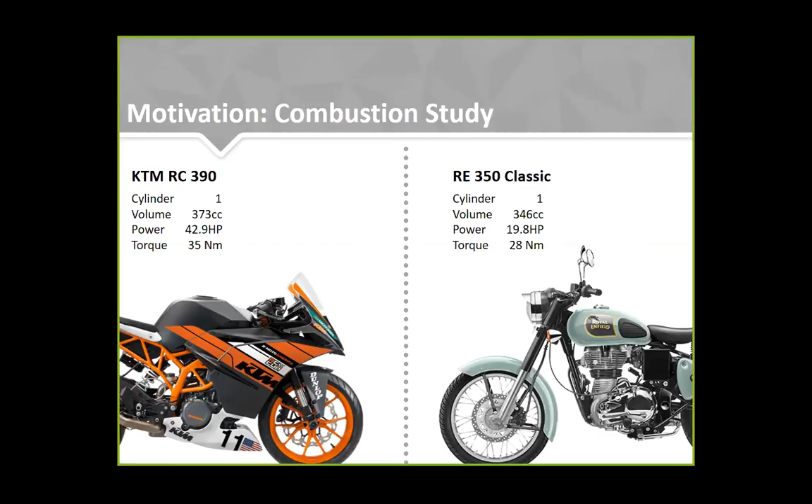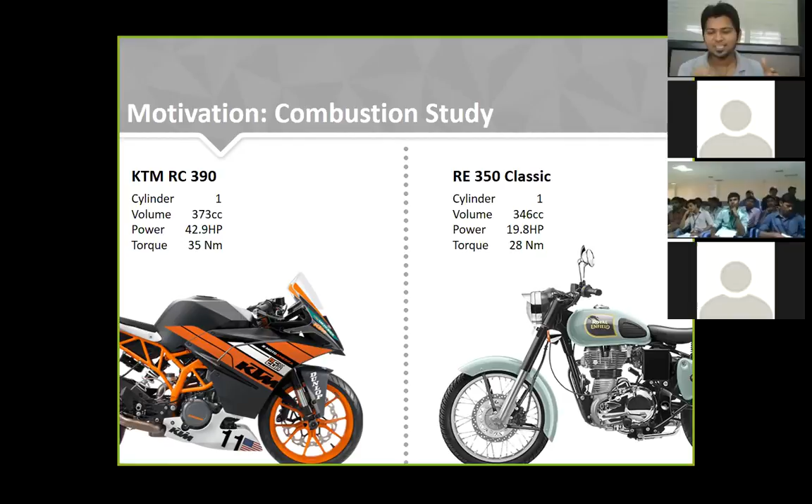So if I compare these parameters with the Royal Enfield 350, the output parameters of the engine actually vary - the power only goes up to 19.8 HP, and the torque goes only to 28 Newton meter. So this is the difference between these two engines, and you know both bikes are for different purposes, and both perform differently. So we have to find out technically what is the technical reason or aspect lying behind the conception or design of these two engines.

So guys, this is the technical aspect. If I compare the power-to-volume ratio of the KTM to the power-to-volume ratio of the RE, that's Royal Enfield 350 - the value that comes out for KTM 390 is very, very high as compared to the RE. This means the efficiency of the KTM RC 390 is much better than the Royal Enfield 350. You can think about that.

So if I talk about the torque-to-volume ratio, that again, in the case of KTM, is much higher than that of the RE, the Royal Enfield 350. So from these two figures, basically we can conclude that the KTM RC 390 engine is more efficient as compared to the 350. But actually, is it true or not? We will find out the reasons and answer in upcoming slides.

So from these two figures, one thing is clear: the KTM 390 engine is performing better as compared to the 350. But the question is this: are the Royal Enfield people fooled? Why can't they make their 350 engine similar to the 390 in efficiency? So these are a few questions we have to understand technically.

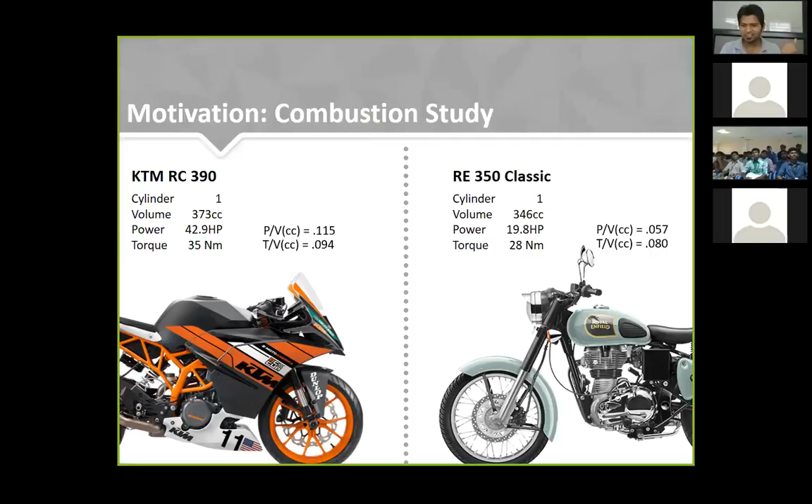So I'm going further on this study. If I talk about the engine design objective - any company who designs and manufactures engines basically has four objectives in front of them before designing any engine. The first thing is the engine should give maximum useful work, that is torque, maximum useful work. Second, it should emit the lowest possible emission in exhaust. And third, maximum fuel economy, so it could perform better in the market. And the final thing is smoother operation.

So any company basically tries to fulfill all these four parameters in the engine design. But if I talk about lower cost engines, like the Hero Honda engines of Passion, Splendor - these are very cost-effective engines. They may comply with the first three aspects, meaning maximum useful work, lowest possible emissions, maximum fuel efficiency, but are a bit rough, or we can say have a bit lesser smooth operation.

You can understand that these are the basic four parameters behind design of the engines. If you refine all of these parameters step by step, the cost of the engine will increase. And that is why the engine of Yamaha R15 or Yamaha series engines are costly and very efficient as compared to any of the engines in the category of the bike. So larger you work upon these 4 parameters, larger the cost of the engines. And if you give fewer of these parameters, the cost of the engine will be lesser.

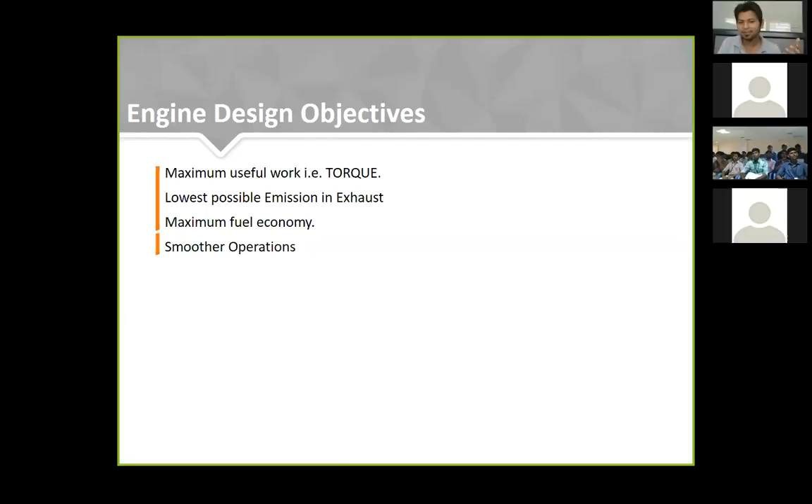So these are the basic 4 parameters behind the design of any of the engines. And this is the basic working of the 4-stroke engine, which I hope you are all aware of.

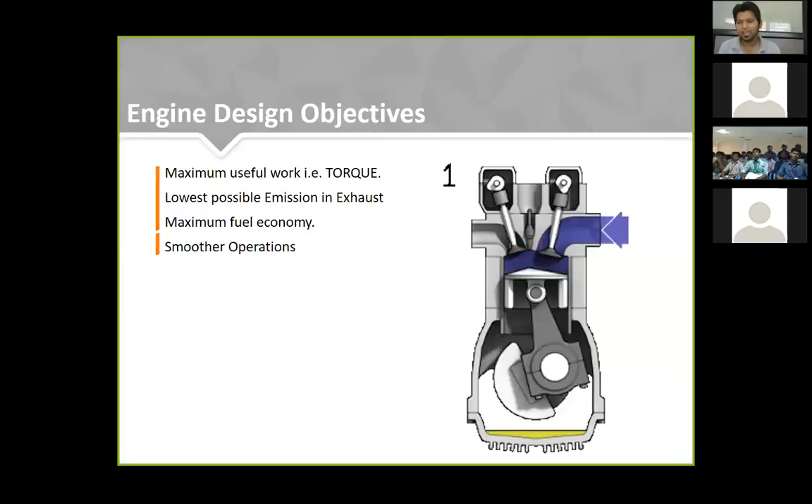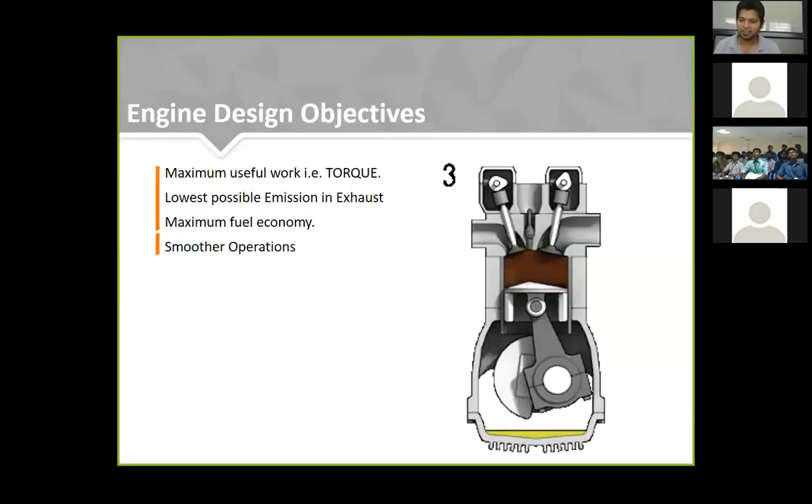The 4 strokes in the working of the 4-stroke engine are: first, the intake stroke, through which the air and fuel mixture is induced inside the engine. Second, the compression stroke, which compresses the air and fuel mixture. Third, the expansion or power stroke, in which the useful energy of the engine is extracted out in the form of push to the piston.

And the final one is the exhaust, through which we expel out all of the waste or residue inside the engine. Now, through this very engine, I'm going to introduce the basic parameters of any engine. Some of you may be familiar, but try to go through all these basic parameters.

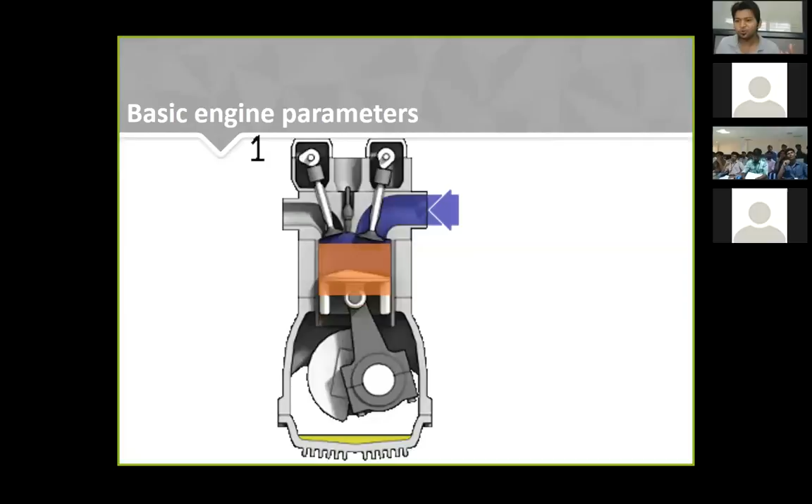First of all, the cylinder. The one in which the piston reciprocates is known as a cylinder. The volume of this cylinder is known as the cc of the engine. I mean, how much liquid you can pour into this volume, that could be termed as the cc of the engine.

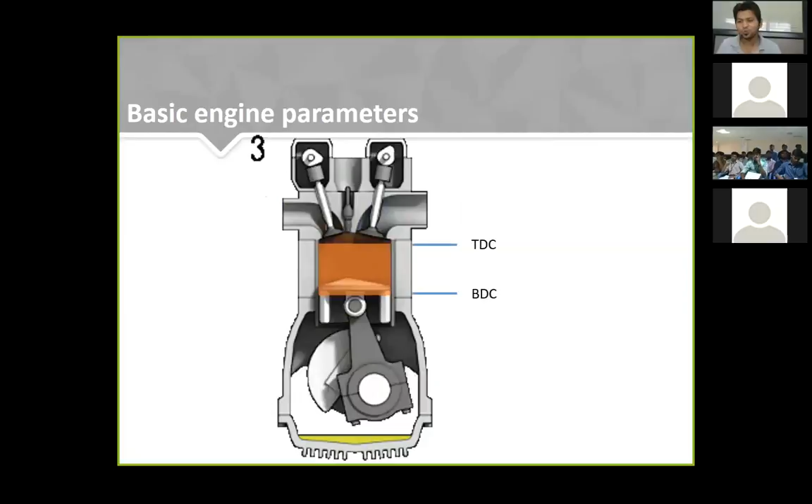Similarly, in this cylinder, the piston is reciprocating between 2 extremities, the top one and the bottom one. These 2 are known as the top dead center and the bottom dead center, which you are all already aware of.

If we define this cylinder, it is basically having 2 parameters: the diameter as well as the length. So this is the main configuration of the engine, the main deciding factor of the cylinder, or the main depending parameter of the cylinder - the diameter as well as the stroke of the engine.

In any engine, among the different designs present in the market, they may have a different kind of cylinder. Basically, there are 3 different kinds of cylinders available in the market on which actual practical engines are manufactured: over, square, and under. I hope you recall these parameters - you might have heard of these 3 cylinders somewhere in your study.

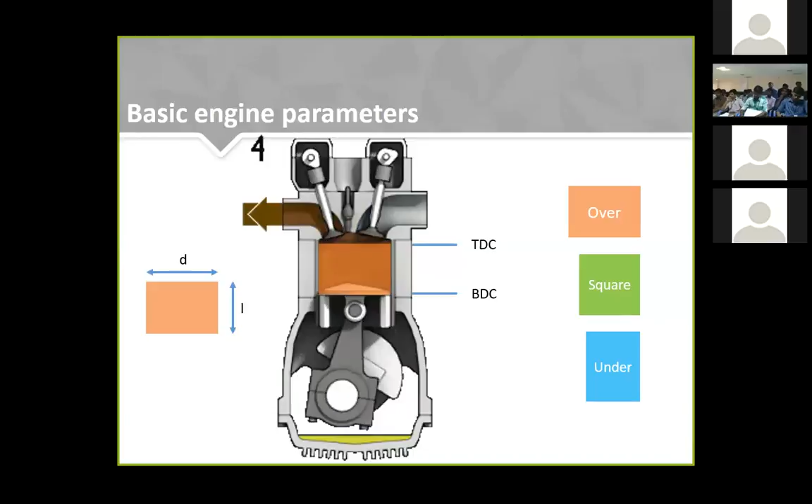The over cylinder is basically having a larger diameter and smaller stroke length. If I talk about the square, both D and L ratio, both parameters are equal. And if I talk about the under, the D is smaller than the L. So these are the 3 configurations available in any engine design in the market.

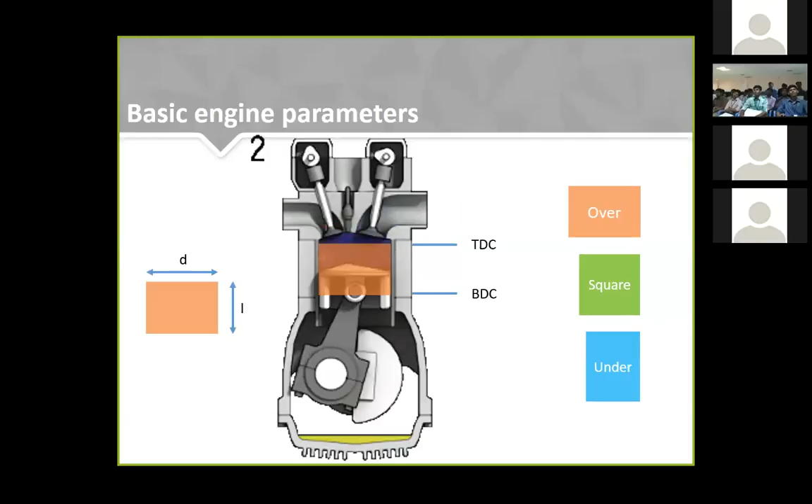If I talk about the basic 2 engines on which we started our study, the KTM 390 and RE 350 Classic, in order to see the difference between these 2 engines from a technical point of view: the KTM 390 has a single cylinder, bore equals approximately 90mm, and the stroke is basically 60mm.

If I compare with the RE350, you can check it out - the cylinder of the KTM 390 will be called over, and the RE350 cylinder will be known as under square. This is the basic difference between these 2 engines - how you will feel the thump of the 350 and how you will feel the high rev power at high revolutions of the KTM 390.

So we will try to find out where this very configuration will make a difference in the performance of both engines.

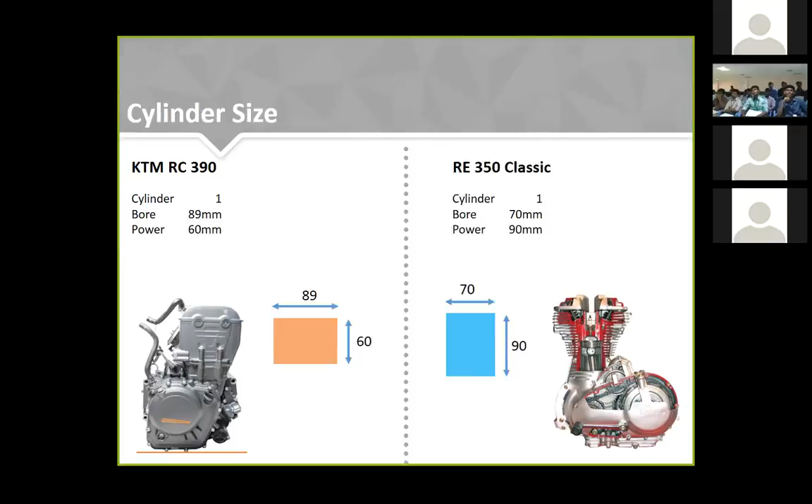Okay, so for example, let's take both the cylinders from both of the engines. We have a spark in both of the cases. I'm just going to carry forward a small experiment in front of you. Suppose that in both of the engines, we have a similar amount of fuel injected through the carburetor or through the fuel injector. So you can say that in both of the engines, we have a similar kind of fuel that we are going to burn.

And imagine that both of the cylinders are having an efficient or similar kind of blast of the fuel. So what you can conclude is, in both cylinders, if the air and fuel mixture burns, it will create a similar kind of pressure. Am I right or not? So a similar kind of pressure will be generated in both of the cylinders.

So if both cylinders have the same amount of fuel and are burning with similar efficiency, we can say they have the same pressure. But you know that the area of the KTM 390 is bigger compared to the area of the 350. So what you can conclude is the force that will exert on the piston in a KTM 390 will be higher compared to the 350 Royal Enfield.

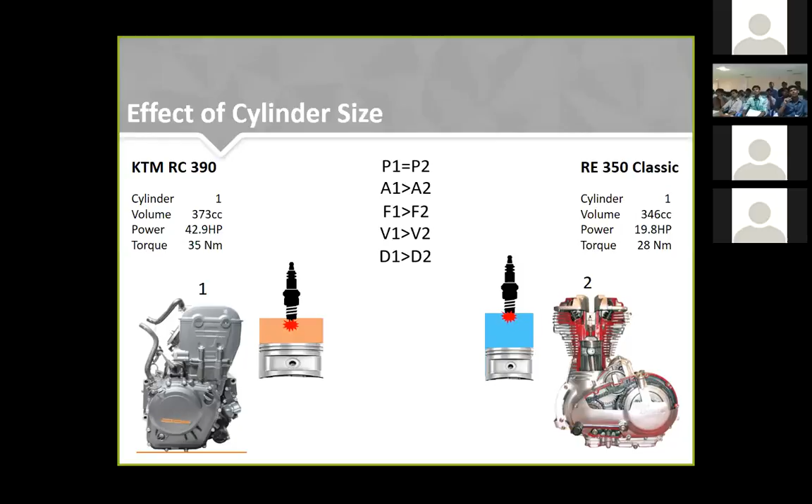Now you can feel why your 350 Classic or Royal Enfield cannot go beyond 6,000 RPM, and that is the reason why your KTM 390 can go up to 10,000 or 9,000 RPM. So we can conclude that the RPM of the first engine will be higher than the RPM of the second one.

We can say that the KTM 390 can go from 800 RPM, which is the minimum or idling RPM, up to 10,000, the maximum possible RPM. In the case of the RE350, you can go from 700 to only 6,000, not more than that.

And you know why you cannot go more than that, because you are stuck with the design of the piston. You have increased the stroke length of the engine, and by design you cannot go beyond 6,000. That is the technical parameter why this 350 cannot go beyond 6,000.

Okay, I think till this point everything is clear to you. One thing you can understand from here is, in the case of the 350, we have a blast, and in the case of the KTM 390, we have a similar kind of blast in both engines. Having the same kind of blast, but you can imagine that the gases inside the 350 remain for a longer time.

Can you imagine this point? So my point is, the burned or burning gases during the expansion stroke or power stroke remain for a longer time in the case of the 350 or Royal Enfield. That is the reason why the 350 or Royal Enfield will have a larger punch, because the burning gases remain there for a longer duration, continuously pushing the piston to the bottom dead center of the engine. So that is why the Bullet will have enough torque compared to the KTM.

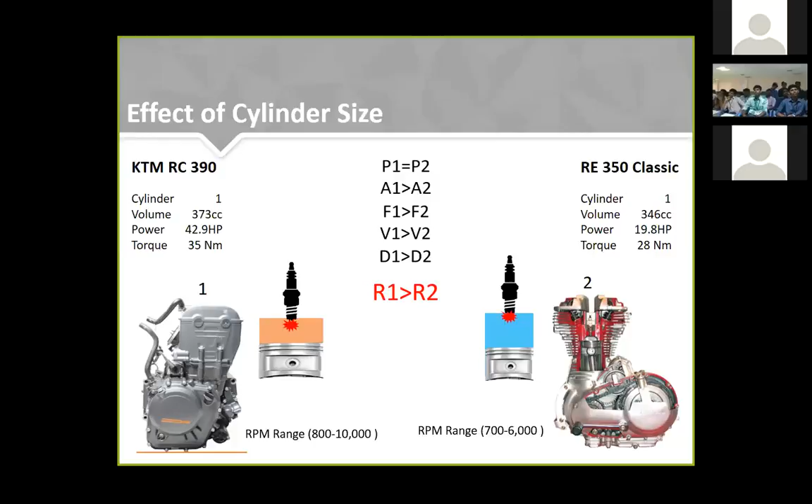First, can you show the cursor on the line? Please raise your hand if you can see the cursor. Yeah, okay good, I got the response. I was asking, can you see the cursor on the screen?

Take the same example again. You are three friends and need to go somewhere, and you have the first option with the 350. When you put your first gear in the 350 Royal Enfield, you will find there is a considerable amount of torque available at lower engine RPM. Even if you put the vehicle at an even lower engine RPM, you can find considerable torque available that will push any tremendous amount of weight on the vehicle.

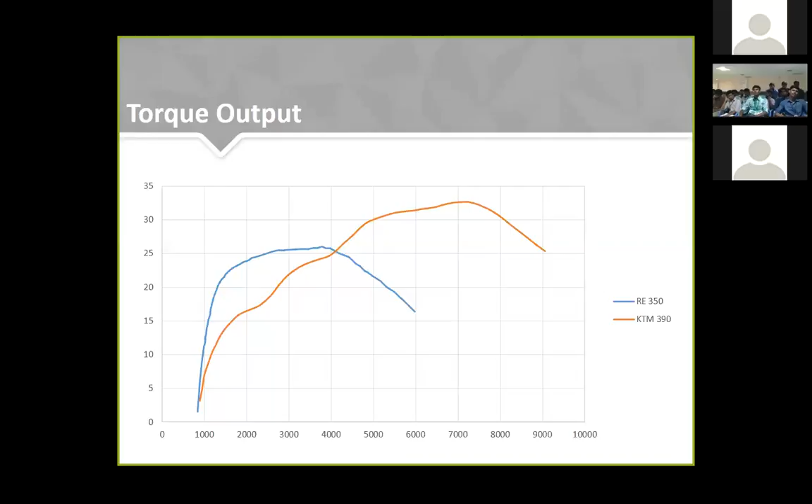But if I talk about torque at higher engine RPM, or for a racing vehicle, this engine will be at the top position. So that's the difference between the torque of these two. I hope you now understand the torque of the engine, how it changes with engine RPM, and which engine is better in terms of torque. So I conclude this point - now let's move to the next part, power.

But it's important to understand that this higher power of 42.9 HP is at a very high engine RPM for this engine. If I talk about the bullet engine, the Royal Enfield engine, this has 19.8 HP at a much lower engine RPM. Try to understand what I mean. If you compare both bikes at that same RPM, you'll find the bullet is actually better than the KTM.

The KTM is taking benefit only of its engine design, meaning it can go up to higher engine RPMs compared to the Royal Enfield. If I limit the RPM of the KTM 390 to 6,000 only, by any means like ECU mapping or ECU design, the bullet will be the better design than the KTM. Now you can understand what I'm trying to say.

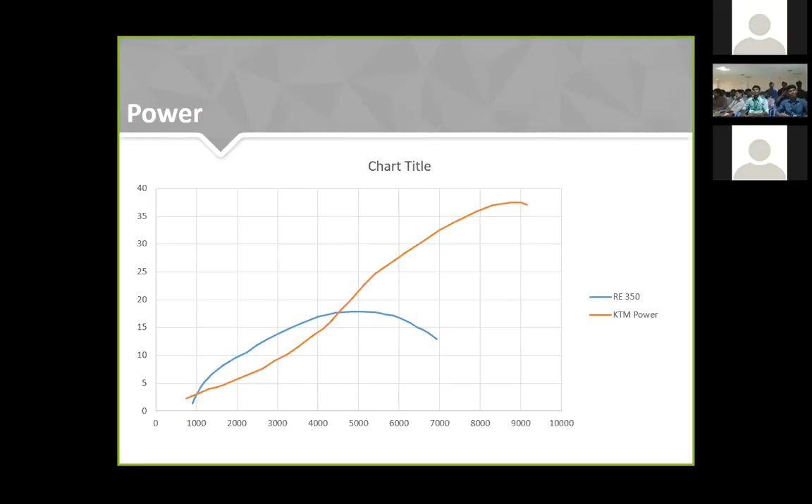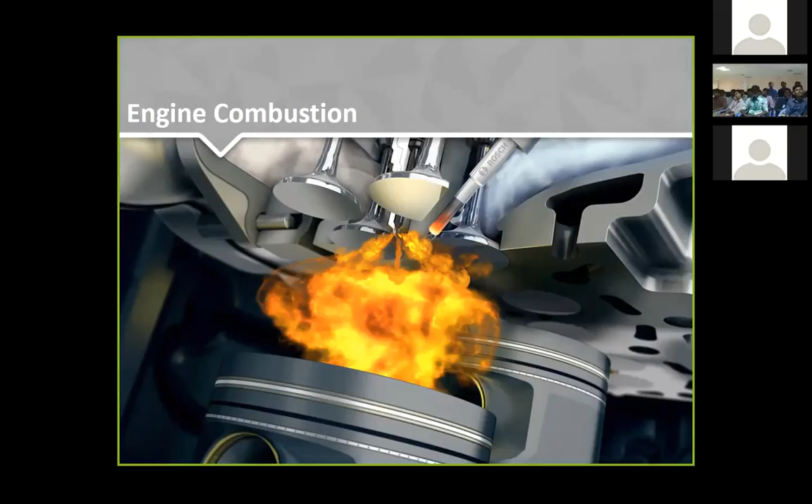I've taken this picture of a Bosch engine, basically a diesel engine, and combustion happens something like this in any engine, regardless of whether it's a petrol engine or a diesel engine. Let's get into the combustion of any engine.

So let's talk about combustion, the factors affecting optimal combustion. I'm going to talk about optimal combustion — basically the combustion which is best on its own, nothing can be expected beyond this. That is known as optimal combustion, considering all parameters within a safe boundary.

For example, you may have the best combustion, but at the same time you're putting lots of load on the engine — that is not optimal combustion. Optimal combustion is the best output from the engine considering the engine design in a safe position: your engine is not going to blow, your valve is not going to come out, everything is safe, but you get maximum output. That is optimal combustion.

Let's define the parameters affecting optimal combustion of any engine. First is the compression ratio, which you're all aware of. Compression ratio means...

Second is the air fuel ratio. In any engine, the fuel goes in mixed with air, and the quantity of fuel and air within the mixture is known as the air fuel ratio, which you're all aware of, I guess.

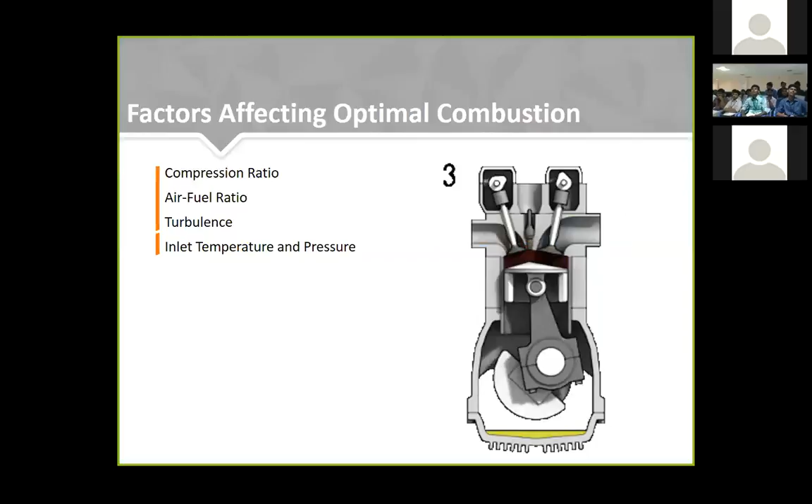In the same way, for air fuel ratio, I am going to discuss its effect on an engine. For example, if I send a lean air fuel mixture - lean meaning a large amount of air but less fuel inside the engine - how will combustion happen inside? Whether it will be optimal or not, whether combustion happens in a proper way, we will figure it out.

The same applies in the case of turbulence, and the same in the case of temperature and pressure of the inlet air. So let's start with the compression ratio. Let's unfold each and every component step by step.

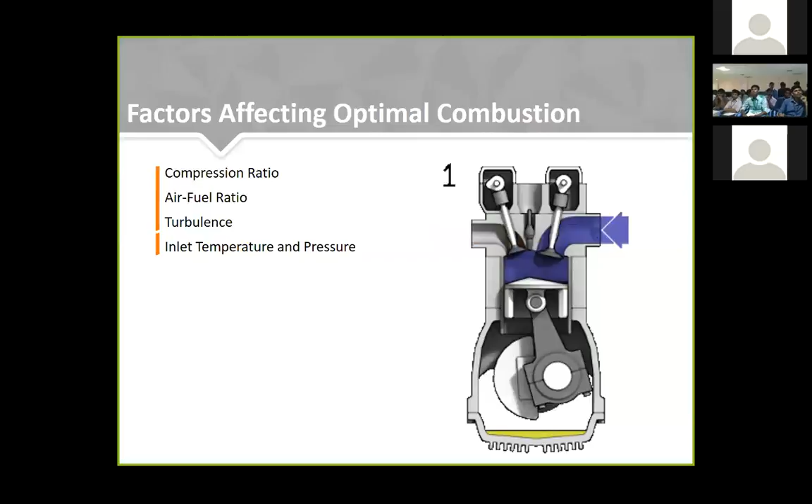Let's understand what's happening inside the engine with the crank angle. As the crank angle progresses, what activities happen along with it? This stage is basically your compression stroke. And before reaching top dead center, at some point, we have a spark.

You might have studied in your IC engine course that the spark is always started a few degrees prior to top dead center, not at top dead center itself. Now I'm going to show you why - what is the reason behind it. The spark is given at some degrees prior to top dead center.

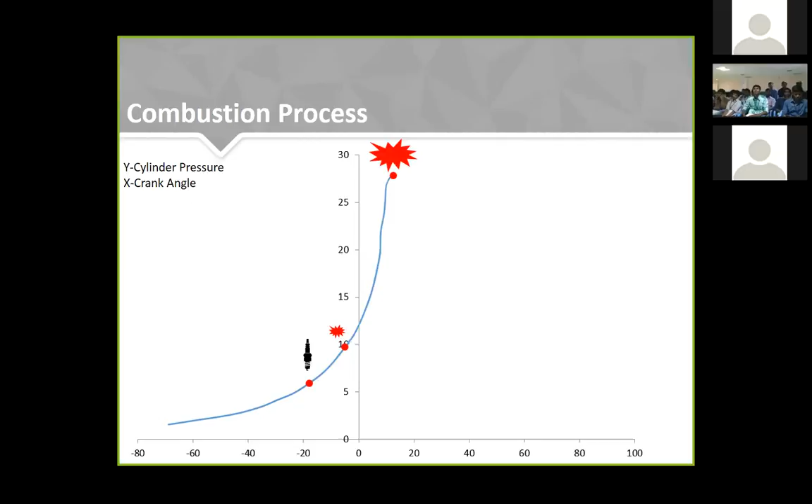The gas continues to compress, and a point comes when the flame starts, or the first molecule of gas gets fired or burned. As it continues, the rapid pressure rise happens, and the bigger blast occurs at the top of this peak you can see. As the piston goes down, this pressure drops to this point, which is where the remaining amount of fuel has burned - this is the further part of the combustion.

I think it's not very difficult to understand - you're already aware of this. So I'm going to add some extra points here. What are the important things in this part?

The first important thing is this: the point at which you give the spark and the time at which it actually gets burned - there is actually a time gap. When you give the spark inside the engine, it does not catch fire immediately, it takes some time. You can find it here - it's happening at -20 degrees and actual burning happens at somewhere around -5.

You can find there is a 15 degree gap. That gap is very important for us from an engine design point of view. When we design any practical engine, whether it's a Bajaj engine or a Pulsar engine, this considerable gap needs to be kept in mind while designing. I'm going to show you step by step how it will affect the engine design if you do not consider this gap.

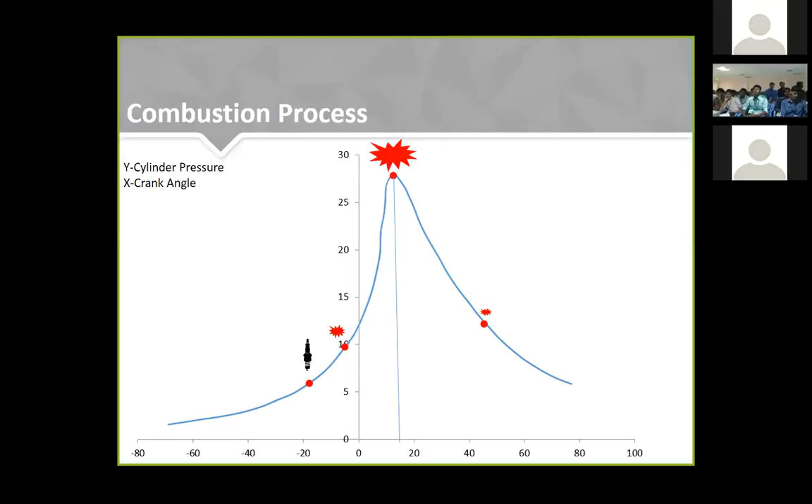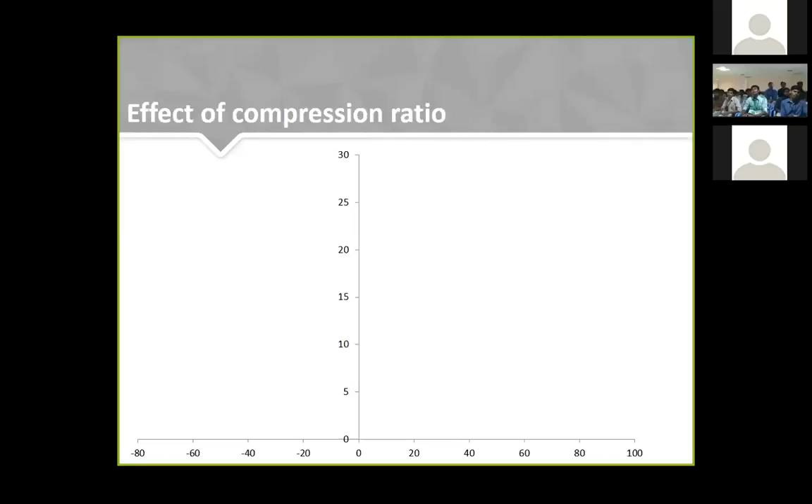Now, in a further aspect, I'm going to show you the effect of compression ratio. For example, you have an engine with a 10:1 compression ratio, and you want to change it to a 12:1 compression ratio. What happens inside the engine, and what do we need to change considerably in the engine? Let's talk about it.

This is the base engine having a 10:1 compression ratio. I'm expecting everybody already knows what compression ratio means, so I won't repeat that point. If, through mechanical changes or any kind of mechanical system change, you modify that very engine up to a 12:1 compression ratio...

So what different kind of peak will be generated in that very engine at the same RPM, assuming the same amount of fuel is going in. In that case, this peak will happen over here. This is the 10:1 compression ratio, and this may be the higher compression ratio, say 12:1. This kind of peak will happen over there.

You can find it over here. There's one glitch though: we haven't changed the timing of the spark. For example, in this engine we again fired the spark at the same time as in the previous case. What will happen? This time will be shortened somewhat. In the previous case this time was a bit higher, but in this case it is a little shortened compared to that one.

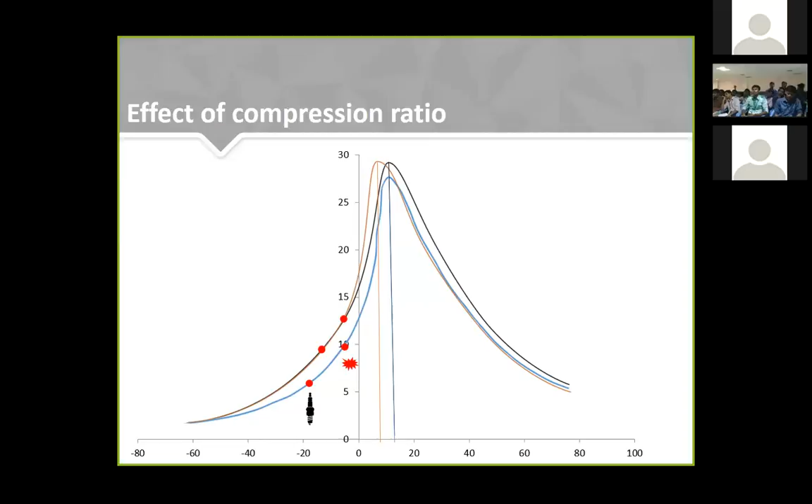Next, I am going to discuss the effect of air and fuel mixture on an engine. For example, we have an engine, any regular engine. Let's try to understand what I am going to show you. If you are running the engine at a lower engine RPM or idling RPM, at a speed of 10 or 20 kilometers per hour, the air and fuel mixture getting inside the engine is burning differently compared to the air fuel mixture going inside the engine at higher engine RPM. I'm going to show you how.

Basically, air and fuel mixture can be of two types that you are aware of: homogeneous and heterogeneous. Homogeneous is completely mixed, and heterogeneous is where the air and fuel mixture is not completely mixed with each other. The diesel engine is the best example of this case.

So here I just took one demonstrating video that will show you how a heterogeneous air and fuel mixture will burn in nature, and how it will be different from a homogenized air and fuel mixture. So that accordingly we could conclude what may happen when the air and fuel mixture is not properly mixed in an engine, versus when it is properly mixed, and how it performs. So the first point is the heterogeneous engine. Try to see this video and pay attention.

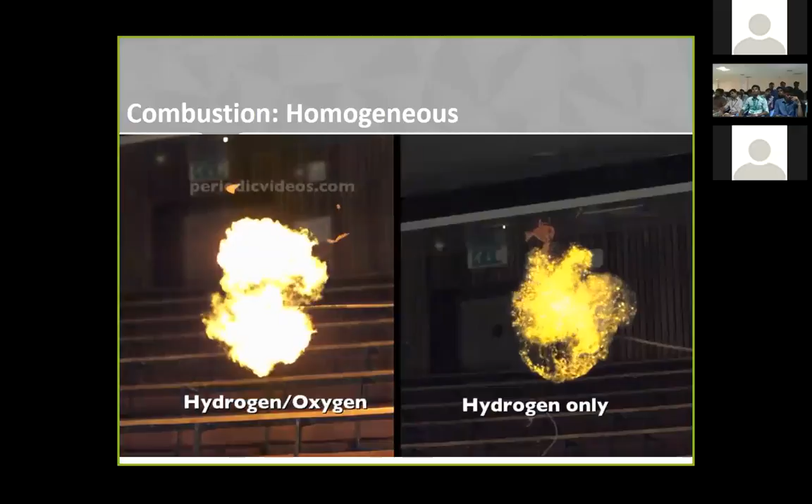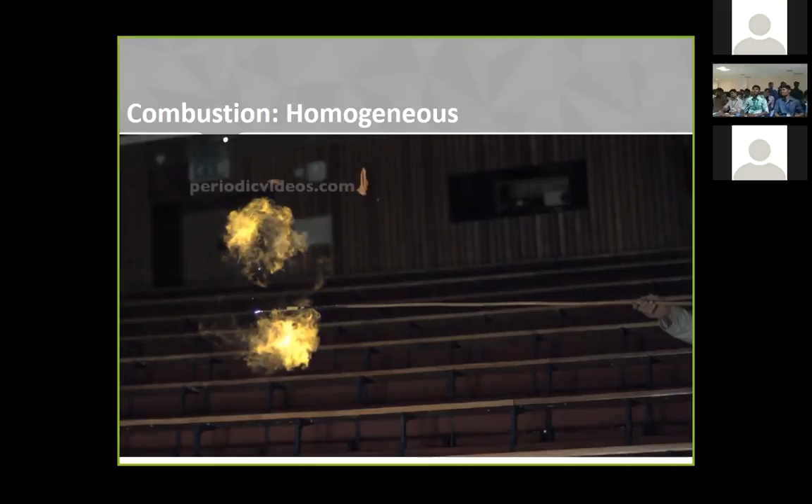Exactly guys, this is happening inside the engine when your air fuel mixture is completely homogenized, and when it is not homogenized, basically heterogeneous. You can check it out: if the air and fuel mixture is heterogeneous, as shown in the video, it will take a little bit longer time to get fired or completely burned. And if I talk about the homogenized mixture, it will take very little time to get completely burned, and again it will give you a blast in a small time.

You can find out the difference, because as engineers we can understand what is impulse. You are getting the same kind of force, but one force you get over a longer time, and another force you get in a smaller time — and which one is better, which is the impacting one? Yeah, that is the homogenized one. So that is the thing which is expected from a gasoline engine. We are required to provide a homogenized air and fuel mixture inside the engine so that we could get better performance out of the engine.

Take the first case, for example — we have just started the vehicle with the help of a key, and we are running it at idling. At that moment... sorry, I cannot — no, I'm not going to take that example, that is for something else.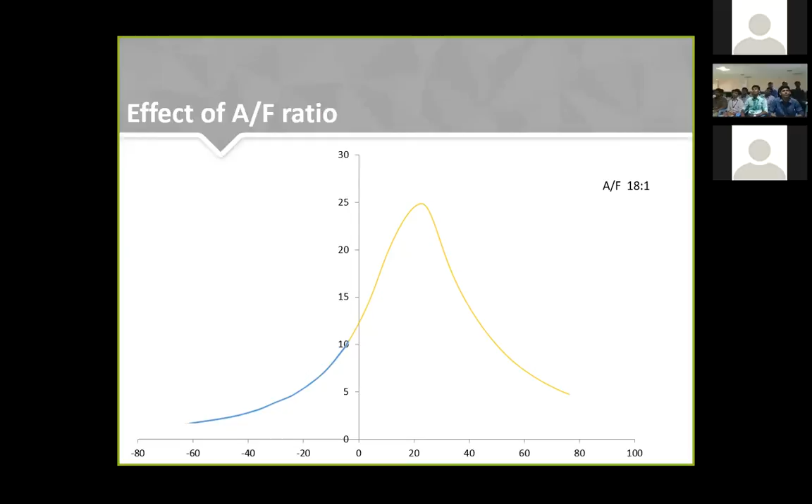This will happen. In this case, we have an air fuel ratio of 16 is to 1. Air is less and fuel is a little bit more, and you can find the peak is slightly increased. This is because a larger amount of fuel is present. Technically, the larger the fuel present, the bigger the blast, and the larger the cylinder pressure will be.

And next, if I increase it further in that way, you can find this happens. In case of the gasoline engine, that is mistakenly written over there as 1.47 - it should be 14.7, the stoichiometric or chemically correct ratio for the gasoline engine. For the gasoline correct ratio, this will happen.

And if, for example, I increase the air and fuel mixture ratio, even if I make the air fuel mixture a bit more rich, then what will happen? This will happen at the ratio of 12 is to 1. If I make the air and fuel mixture a bit more rich, this will happen.

I mean to say there is a point at 12 is to 1, up to which the combustion can be enhanced. But if you go for enrichment of the fuel beyond 12 is to 1, there is no significant effect on the cylinder pressure. So your engine technically should not run beyond 12 is to 1.

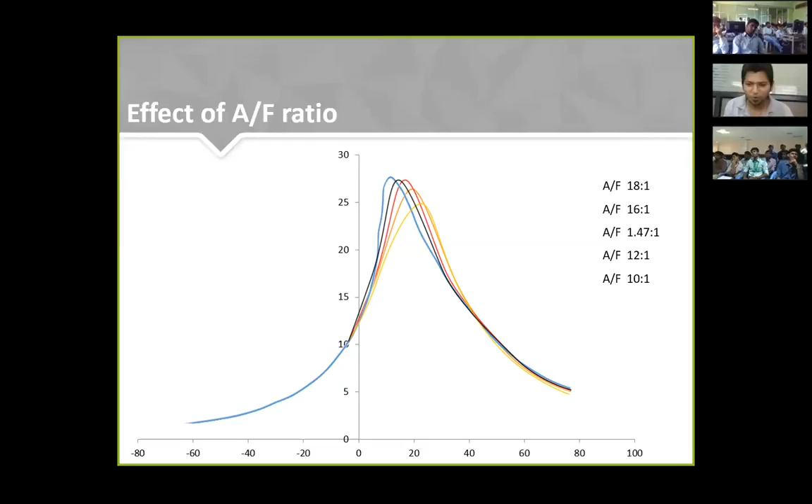So, effect of turbulence. Being a mechanical engineer, we are very well aware of turbulence in a fluid. If we design the intake manifold of the engine in such a way that the air and fuel mixture comes inside the engine by getting mingled within them, so that they could make proper mixing with each other and combust better.

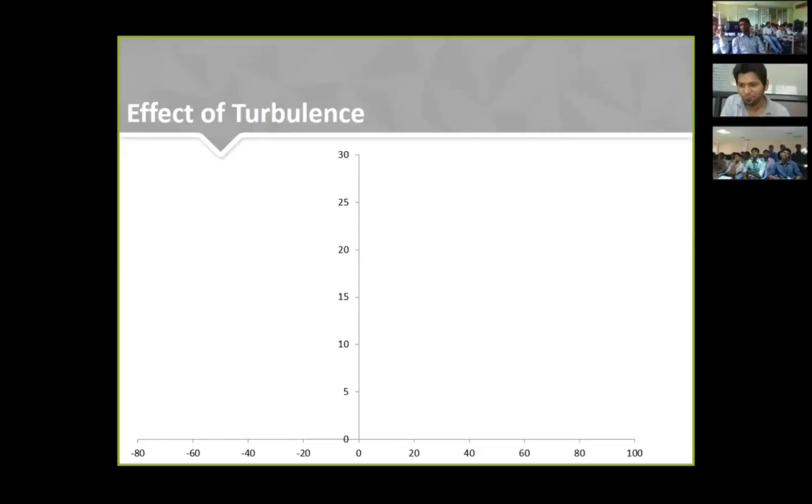So with air and fuel mixture in a proper way, we can say the performance of the engine is better. But let's try to understand how it is so. Let's try to understand that through a graph again - this is the base graph, and for example, we are going to increase the turbulence.

We are going to increase the turbulence, and I'll make sure you understand how we can make turbulence in an engine. We can create turbulence in the air and fuel mixture by changing the design of the intake manifold, the intake valve, the piston crown, the air filter, and the air filter conduit from which air is taken. These are all the parameters with which we can change the turbulence of any engine.

Different engines have different results. For example, take the R15 - its intake manifold is very well designed, better than any 150cc segment bike. That's why the performance and throttling response of the R15 is better. Throttling response means as soon as you give throttle, it responds with a quick blip. That depends upon the intake manifold design.

So if we increase the turbulence of the engine, what happens? The molecules come closer to each other and mix more properly, which leads to a higher peak cylinder pressure. But if we fire with the same spark timing, the peak cylinder pressure will shift slightly toward the top dead center. So what we need to do is put the spark a little later, so that we get another peak at the same specified point at which the engine is designed to operate.

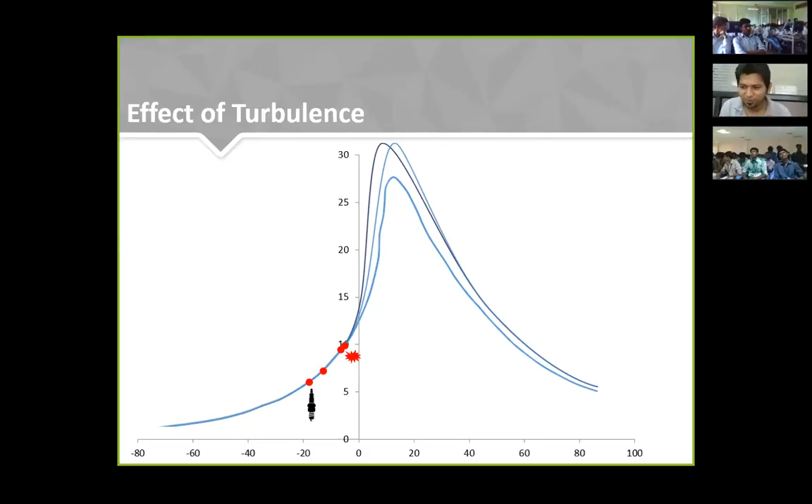Next, I'll show you the combustion curve with respect to engine speed - what happens inside the engine when you start your vehicle from zero. For example, when you put the key in and give it a start, in the first moment it doesn't start, it just misses. This is your motoring curve, which you might have studied in IC engines. This happens when you crank or use the self-start but the engine doesn't start - compression happens, but combustion doesn't begin.

For example, if you manage to start the engine with the help of a choke or something else, now the engine is running at idling speed. Idling speed is the speed at which you're not drawing any power out of the engine - it's running on its own. For example, when you're in traffic, you don't put the engine off, you let it run on its own without drawing power - that is idling speed.

So if you run the bike at idling speed, you get this kind of pressure curve or peak. If you increase the engine speed further by putting the vehicle in second or third gear, this is what happens. And this is what happens. And finally, this is what happens if you run the vehicle at a very high engine speed. One thing is common in all these peaks - this.

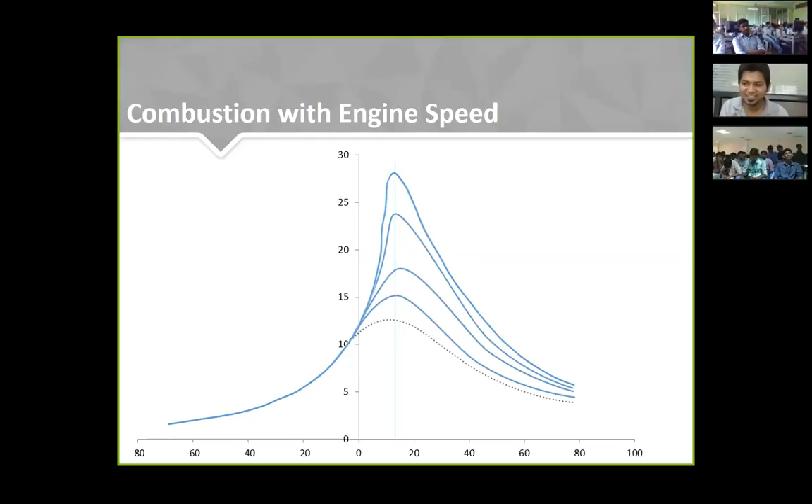These are basically the technical points which we are required to consider before designing any engine. I have chosen only 3 or 4 points to discuss, to make this discussion very healthy, knowledgeable and understandable. But practically, there are n number of parameters which we are required to consider before designing any engine.

Even if I change the valve diameter of the intake manifold, the engine performance will be different. There are lots of parameters required to be controlled simultaneously in order to get the desired output of the engine. Just for the sake of simplicity, I chose a few points to discuss in this lecture, as we already have spent 1 hour.

So I will wrap up all the things in the further slides. Now in the next slide, I'm going to show you the design benefits taken by both engines - the KTM 390 and the RE350 engine.

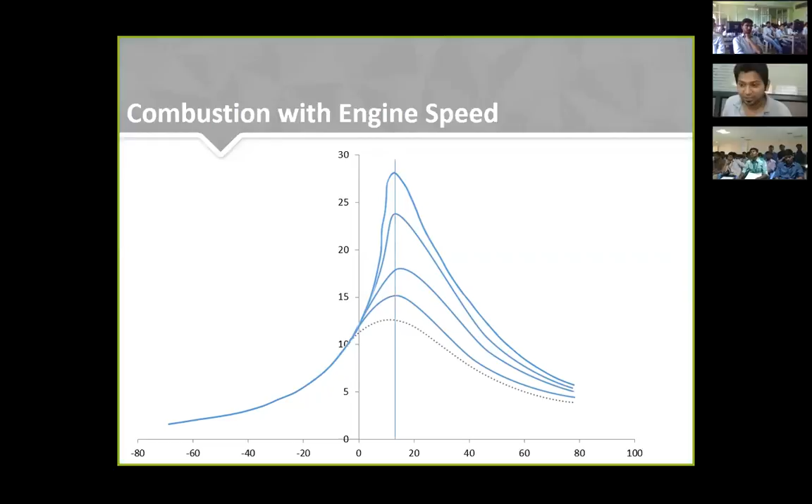The KTM 390 engine has a higher compression ratio. But in the case of the RE350, it has a higher stroke length as compared to the KTM 390. So both of these engines are not compromising in any of the points, but they are the best in their segment.

They are the best in their segment. If somebody asks me which engine is best out of these both, I cannot say anything, because that depends - both of these engines are for two different categories, for different applications, from an engineering point of view.

In case of the KTM 390, a fuel injection system is used - injectors are used to push the fuel. But in the case of the RE350, both kinds of systems are available - the carburetor as well as the fuel injection system.

But in the case of the KTM 390, we have a liquid cooled engine - that's the liquid cooled cooling system. In the case of the RE350, we have only an air cooled system. So these are the basic differences between these two engines, which make both of them best in their segment. This is the design benefits taken by both engines.

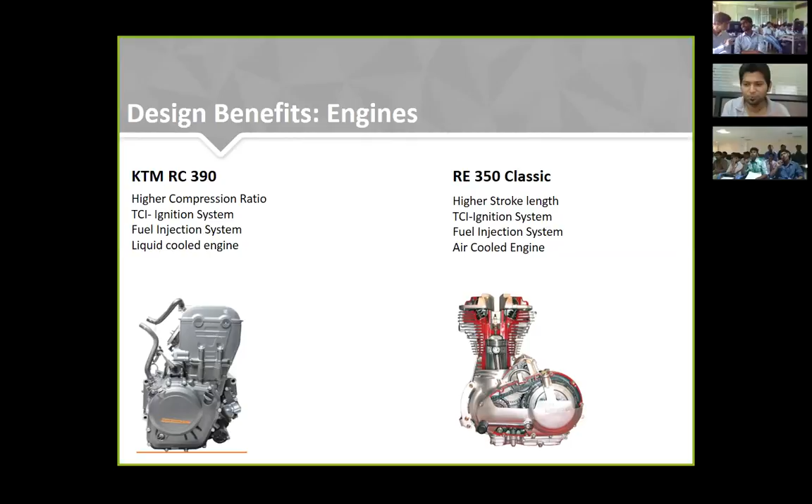Now if I talk about engine design targets - what kind of parameters companies consider before designing the engine. First is the intake manifold design, so that the maximum amount of air and fuel mixture can be taken inside. They design the intake manifold in such a way so that maximum volumetric efficiency can be achieved and a larger amount of fuel can be induced.

Second is the combustion chamber design, so that combustion can happen efficiently. Third is igniting the air-fuel mixture at the optimal point - the ignition should happen such that peak pressure occurs at the specified point on the crank. Fourth is minimizing heat loss by compacting the surface to volume ratio - the larger the surface to volume ratio, the larger the area for gases to escape into the environment, so they try to reduce the surface to volume ratio.

As engineers, we have studied this in mathematics in 12th standard, calculating maximum volume means a ratio of surface to volume. In a spherical shape, we have the least surface to volume ratio. That's why we try to make the cylinder dome in a spherical shape, so that a lesser amount of heat escapes from the engine.

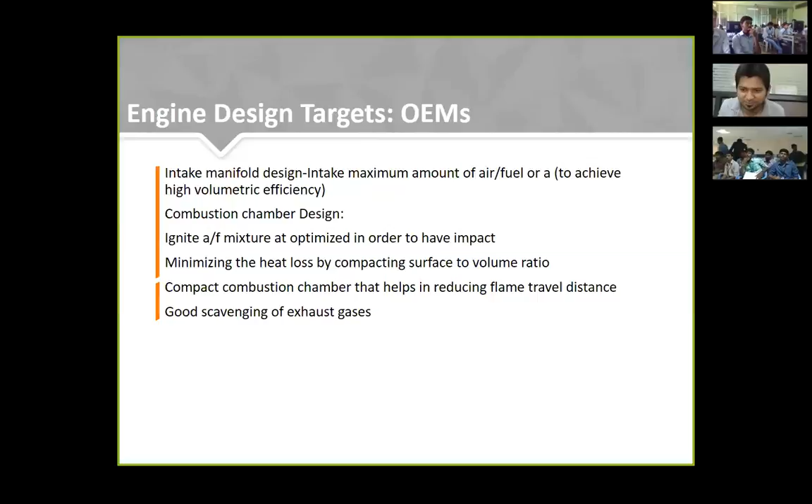Abnormal combustion is basically uncontrolled combustion inside the engine. If we are not controlling the combustion inside the engine in a proper way, it is going to get out of your control and it may damage the engine.

This is all about combustion and its basic aspects of engine design and parameters. I hope everybody learned something out of it, and this might give you some different edge apart from your classroom studies. My aim was to teach in a way the subject is taught, so I took figures in a similar way so you could get ease in understanding the pictures. That's all from my side. Thank you very much, and if anybody has any questions, please pop them in the chat box.